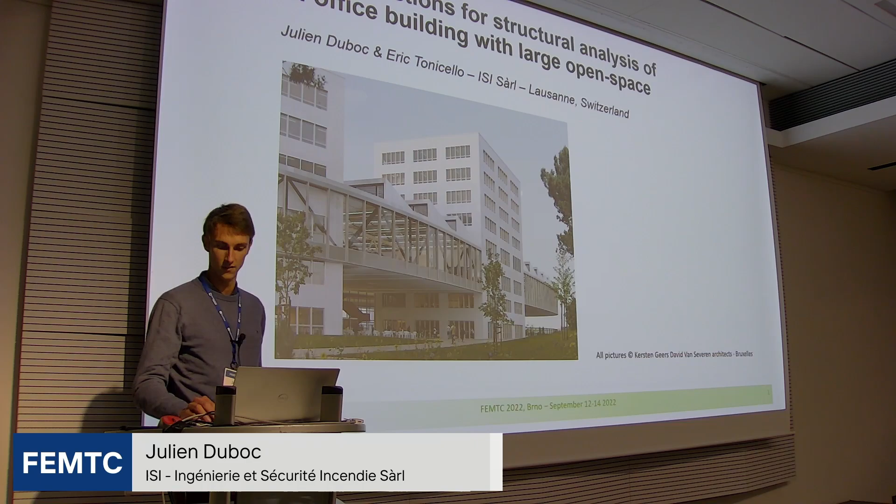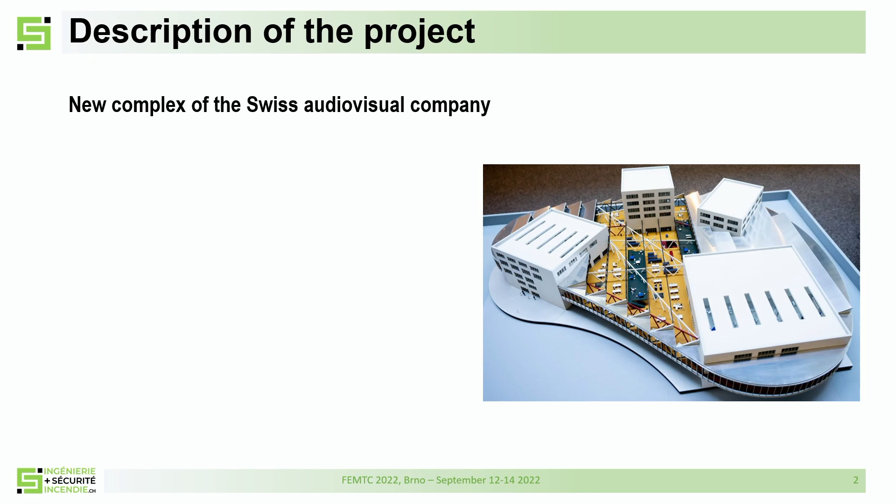Let's start with a few words about the project. This is a new complex of the Swiss audiovisual company. You can see pictures here. We have 4 distinct buildings connected to each other with a hall on the first floor and an open space on the second floor. We have different uses for this complex: radio studios for production, broadcast, offices, and administration activities.

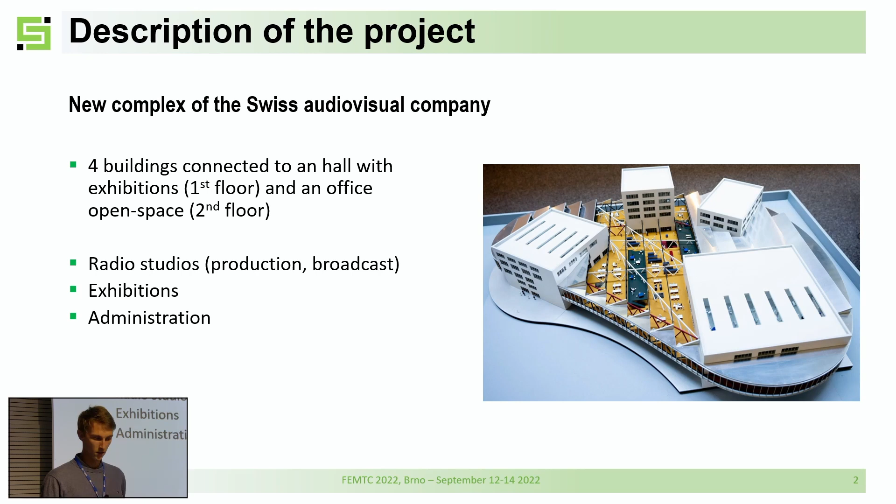So it's a structural analysis, and we focus on the fire resistance of the structure. For this building, according to Swiss regulation, we have a requirement of 60 minutes. For the buildings themselves, there is no specific issue as they were designed according to Eurocode 2 with good covering for the rebars.

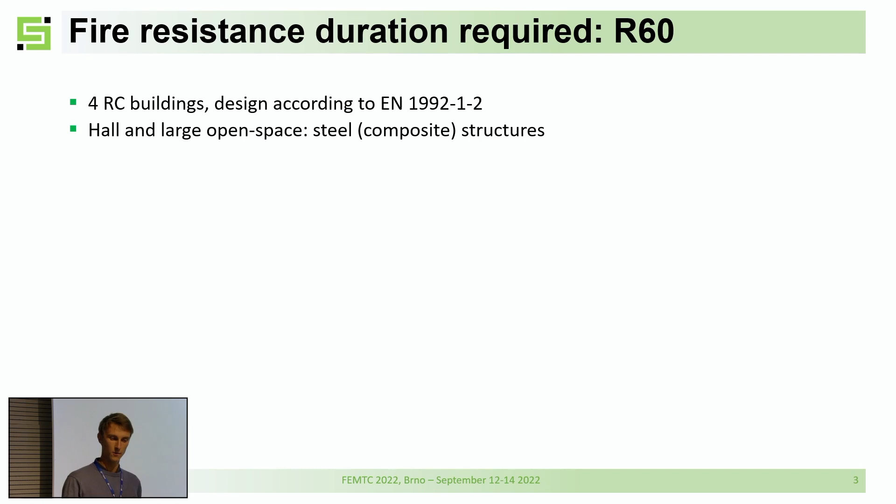But it's not the same for the hall and the open space, because we find steel members, with ceiling beams and truss members - you can see pictures here at the bottom. We cannot achieve the R60 requirement for the steel members, both for the hall and for the open space.

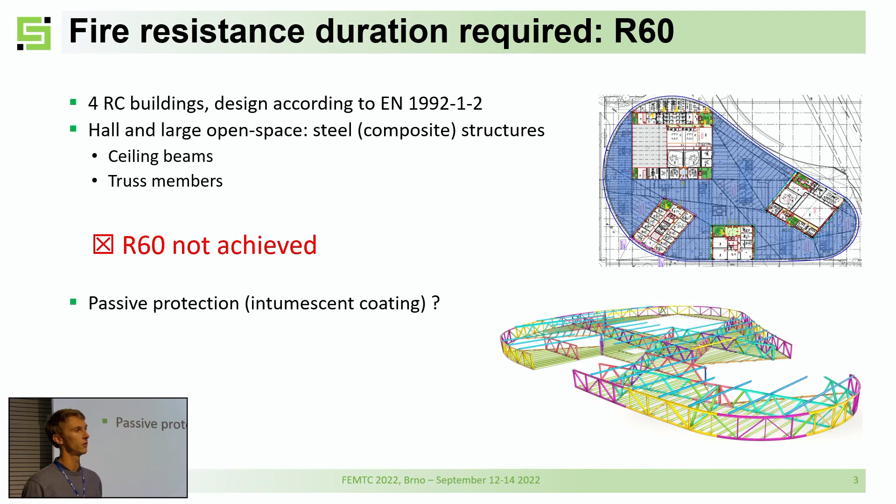So we had to find solutions to improve the situation. It could be passive protection such as fire panels or intumescent coatings, but due to the height of the buildings and the connections between beams and truss members, these options seemed very expensive.

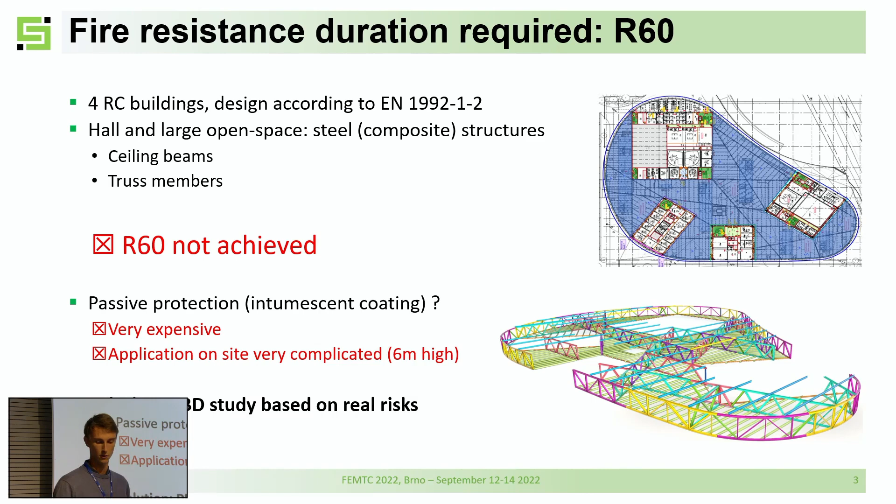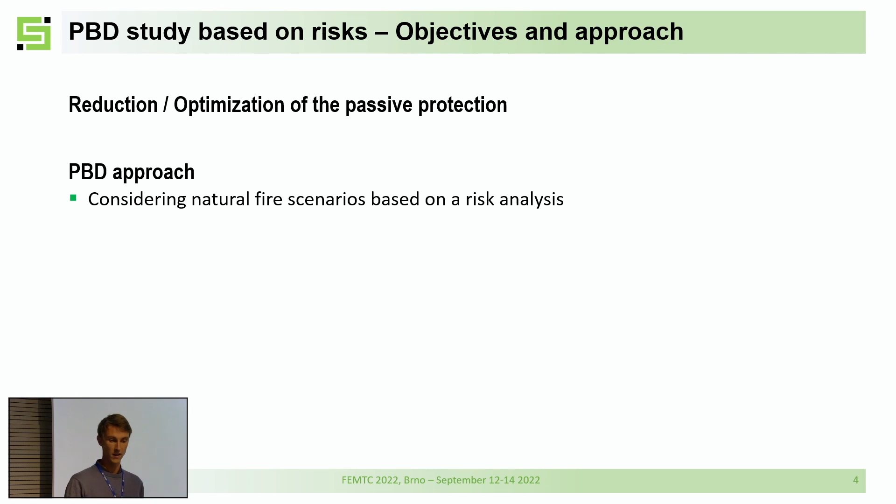So we had to find another solution, and it was a performance-based approach based on risk analysis for these specific areas. The goal of the PBD approach is, of course, to reduce or optimize the need for passive protection, based on a natural fire approach.

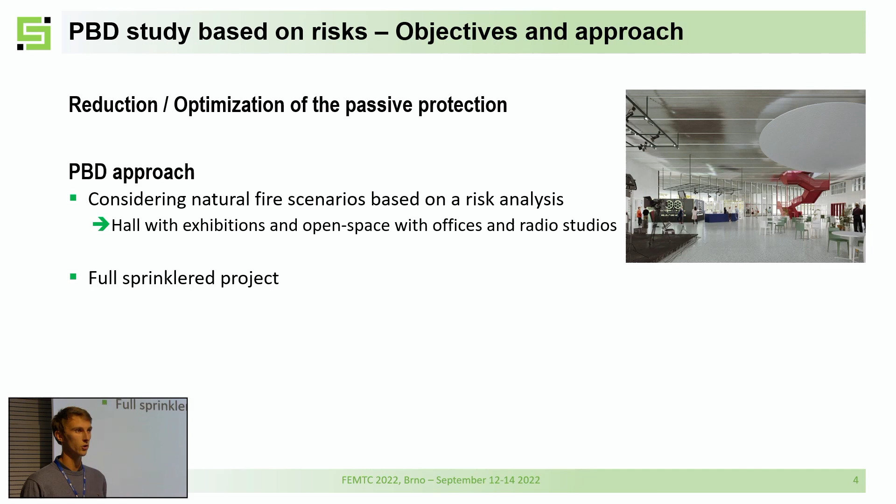If we focus on the risk for the areas, we have a hall with exhibition and reception, and an open space with offices. So we have a fire load density which is quite moderate. We have a full sprinkler project as well, with probably good reliability. And also, as we see in the pictures, we have large windows on every facade, so very good ventilation conditions, which is quite important. We can qualify the risk as moderate for these buildings, which gave us a real chance to make some savings with this kind of approach.

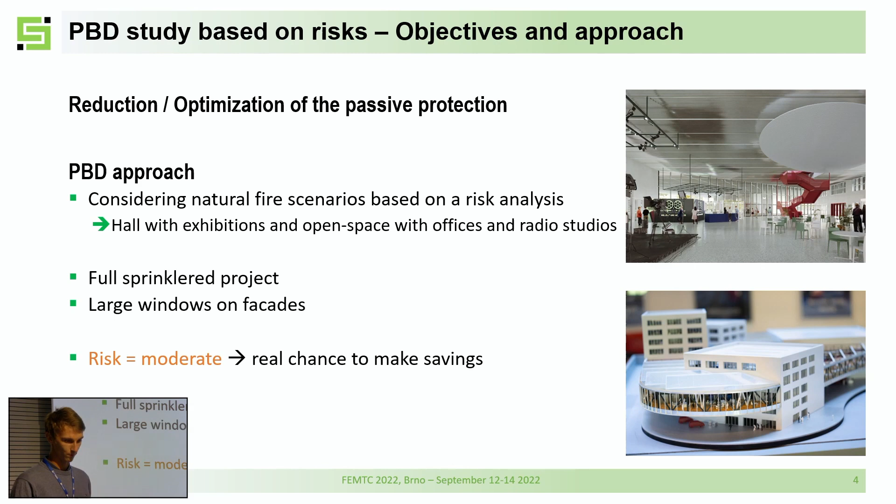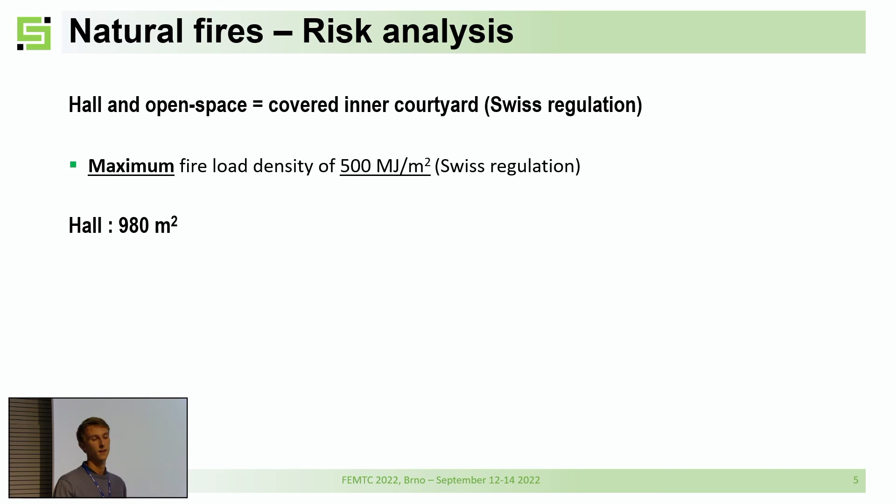So let's focus on the scenarios and the real risk for this building. According to Swiss regulation, the hall and open space are considered as an inner courtyard, where we have a maximum fire load density allowed of 500 megajoules per square meter. This is a first scenario: we can have a uniformly distributed fire load density over the entire area, up to 500 megajoules per square meter. But more specifically for the hall, we have receptions, maybe some events during the year, exhibitions, so it could probably be a more localized fire load density.

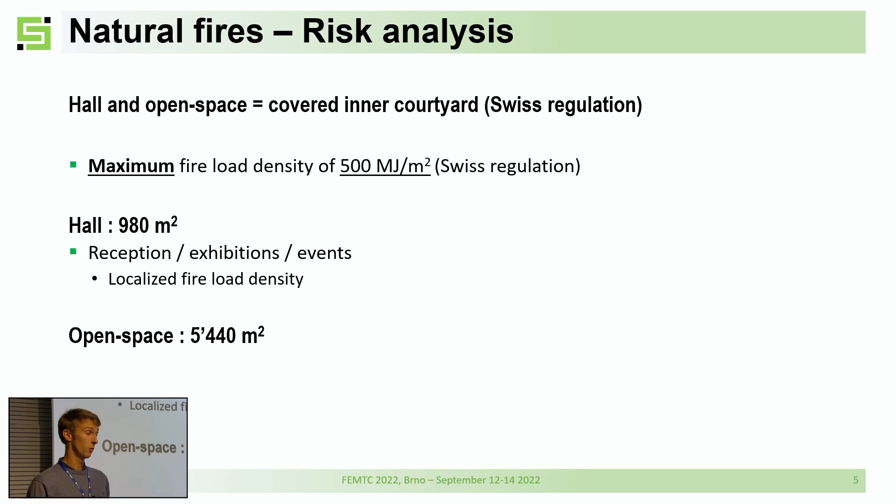For the open space it's quite the same - we have offices, maybe rest areas with seats, sofas, or others. So we can have both scenarios: compartment fire scenarios and more localized fire scenarios.

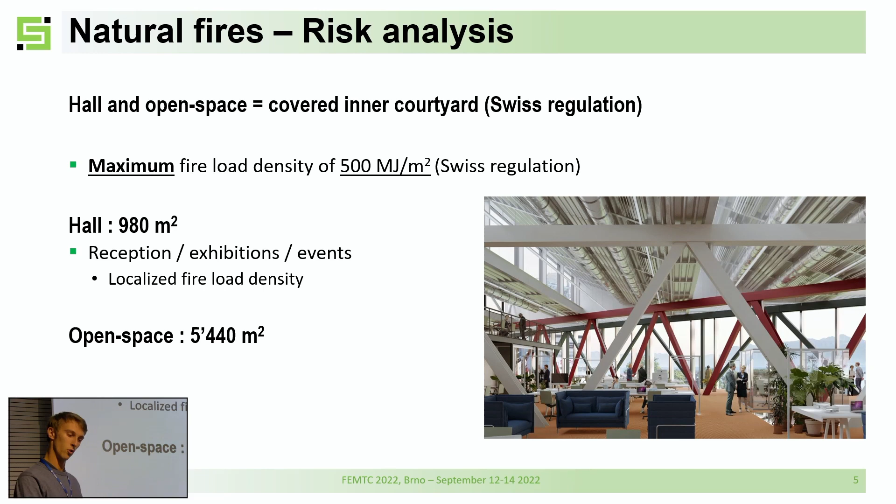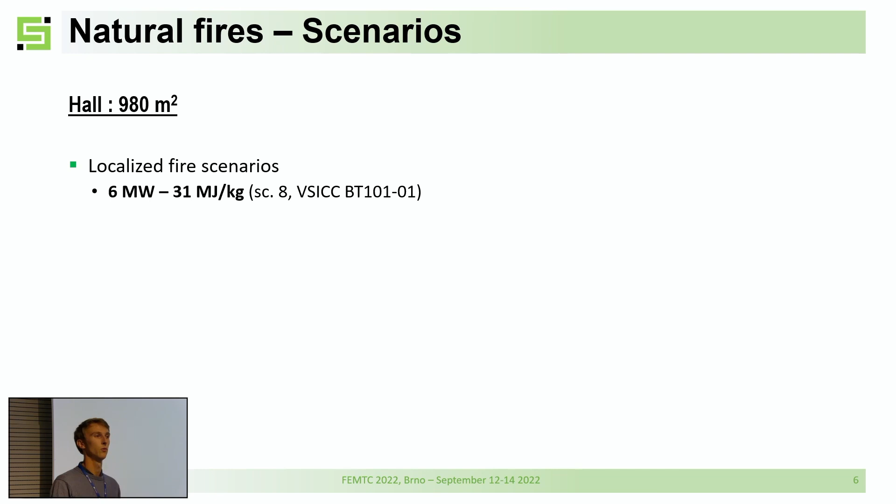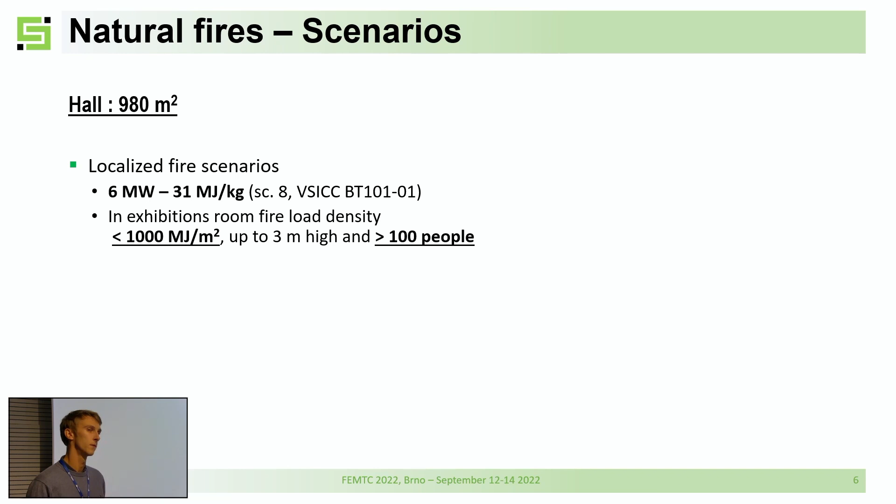So we defined some localized scenarios for the hall according to the German standard, which is often used in Switzerland for the localized fire scenario approach. For the hall, we considered a scenario with a maximum heat release rate of 6 megawatts, which is quite representative of an exhibition room, with moderate fire load density and more than 100 people, which is quite representative for our area.

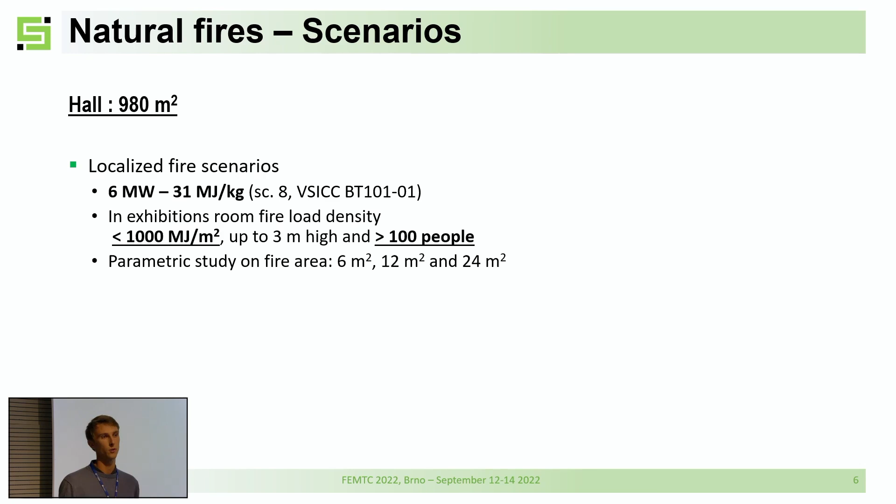We made a parametric study on the fire area in order to consider different heat release rates per unit area: 250, 500, and 1,000 kilowatts per square meter. Here we have the scenario, the heat release rate curve for the 3 localized fire scenarios we considered.

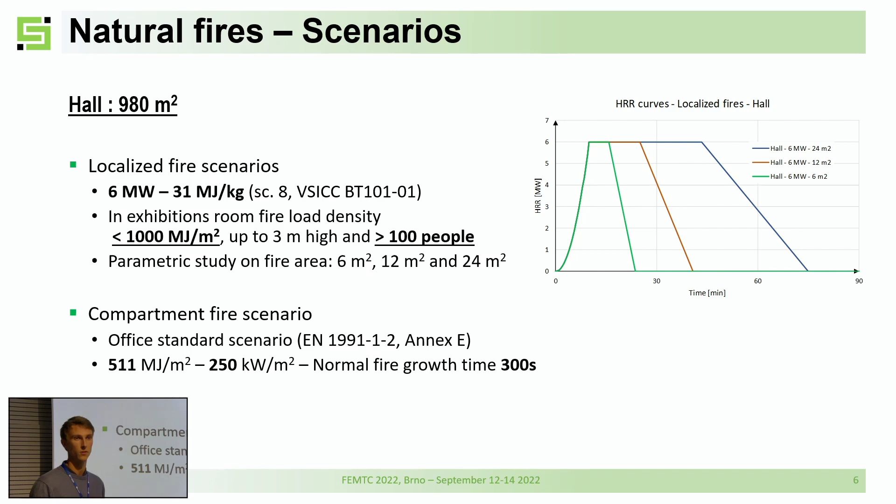And of course we considered the compartment fire scenario as well, with an office use, according to Eurocode 1 Annex E, with a maximum fire load density of 511 megajoules per square meter, which is quite representative of the maximum fire load density allowed for the zone, according to Swiss regulation.

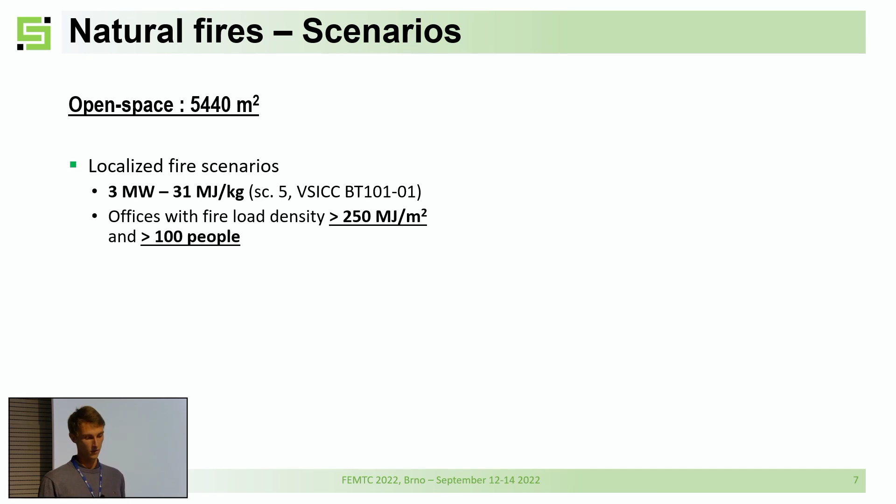Now for the open space, it's basically quite the same, even if the localized fire scenario is a bit different because it's not the same occupancy, not the same use. So we considered a maximum heat release rate of 3 megawatts, representative for an office use with moderate fire load density and more than 100 people.

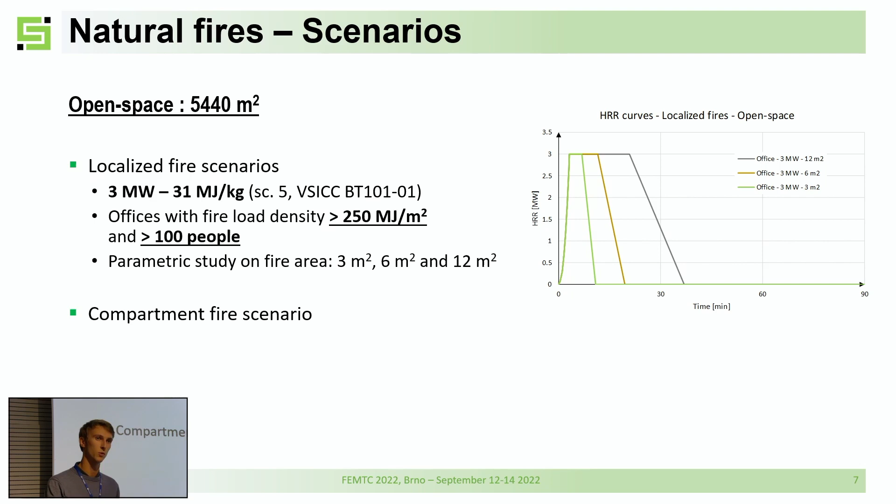We also made a parametric study on the fire area to get the same heat release rates per unit area as we saw just before. Here we have the curves, and we also considered the compartment fire scenario for an office use, still according to Eurocode 1.

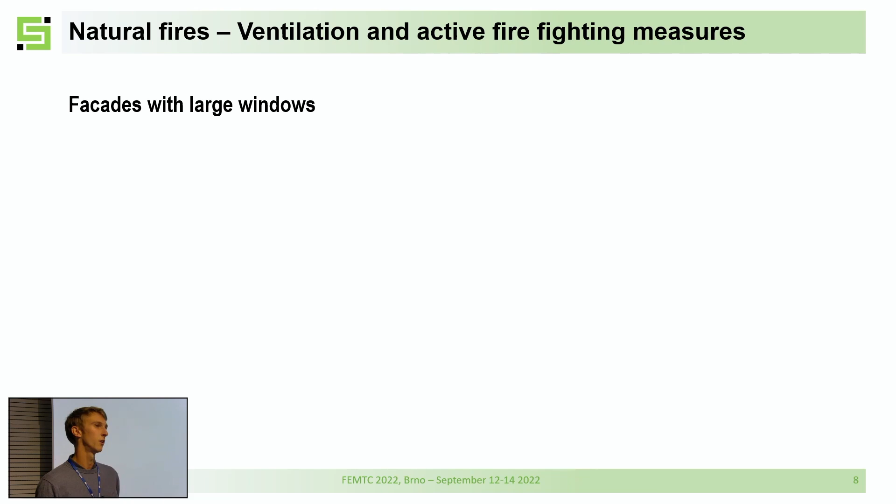So a few words about the ventilation and the firefighting measures we have for the study. As we said before, we have large windows on every facade with double glazing.

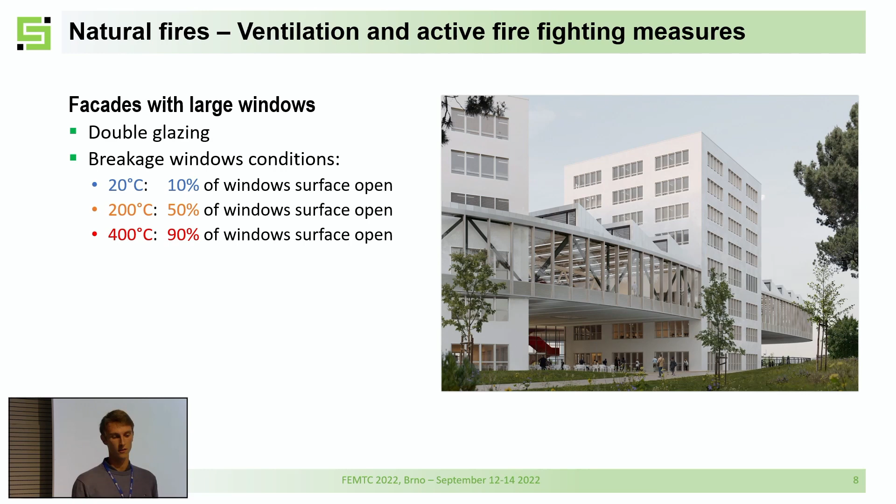So we can consider the breakage window conditions for this double glazing with 10% of the windows open at ambient temperature. Then we can consider 50% of the windows open when the temperature reaches 200 degrees, and around 90% when the temperature reaches 400 degrees.

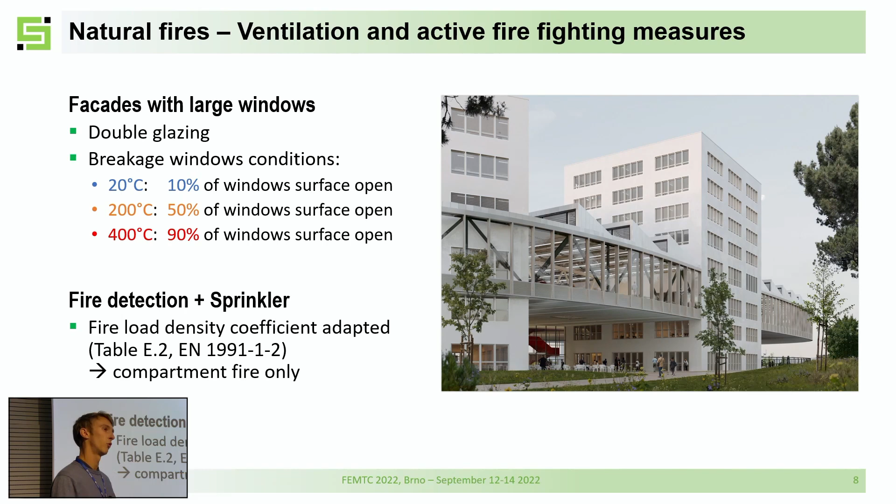Also, we have a full fire detection and sprinkler system in both the hall and the open space, so we can adapt the coefficient of the fire load density still according to Eurocode 1. This consideration is accepted in Switzerland, but only for the compartment fire scenario, not for the localized fire scenario. So we can reduce the fire load density just for the compartment fire.

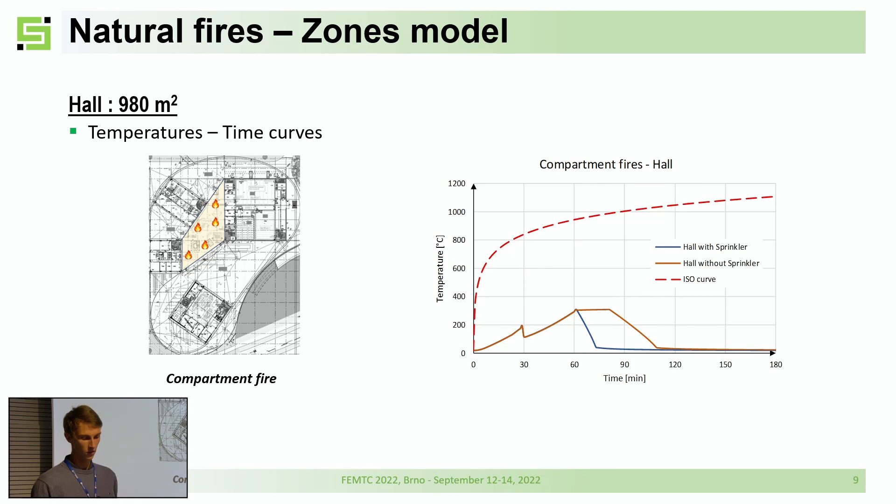The blue curve is the gas temperature results with sprinkler installation, so with the minoration of the fire load density. And the orange curve is the gas temperature results without sprinkler. What is interesting to see is the maximum gas temperature in the upper zone, which is less than 400 degrees.

So for the structure, it's very, very good, as we have no decrease of the steel resistance. The steel keeps the same resistance as in the cold situation. So we can say that the requirement R60 is achieved for the beam, the ceiling beams in the hall.

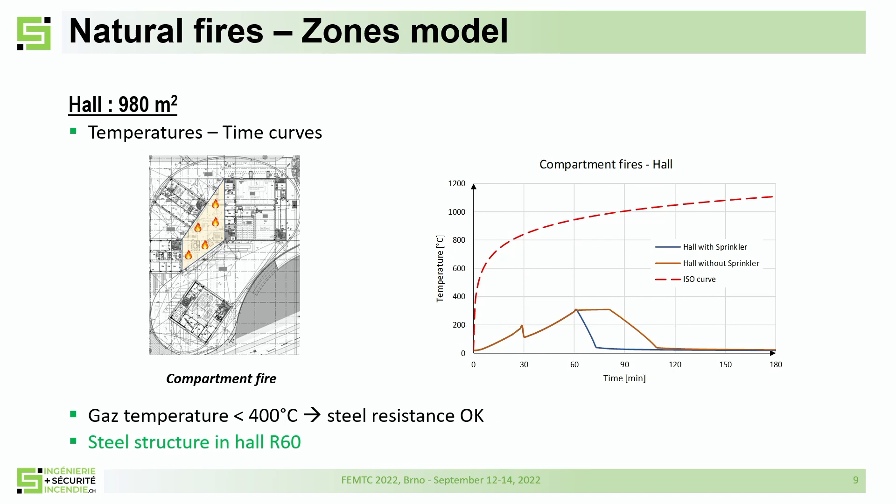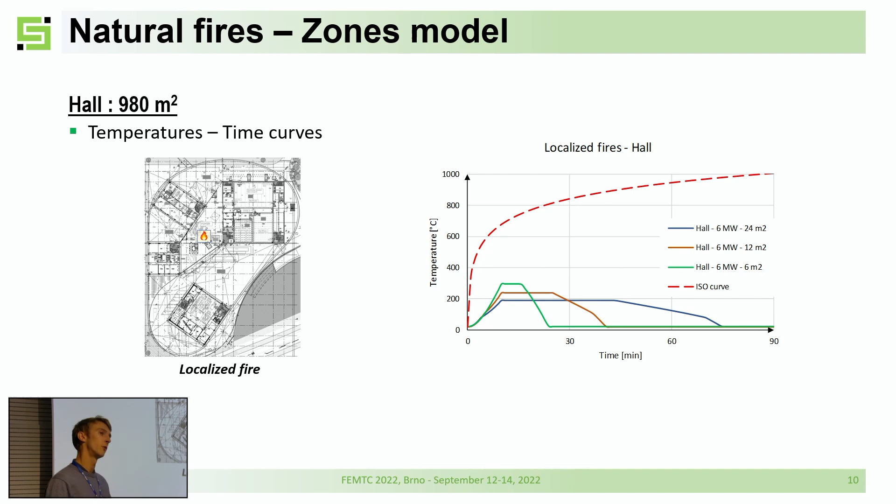Now for the localized fire scenario, here we have the results for the three different scenarios we considered, with the three heat release rates per unit area. And the conclusions are the same, as we have a gas temperature less than 400 degrees. So of course the steel temperatures remain less than 400 degrees.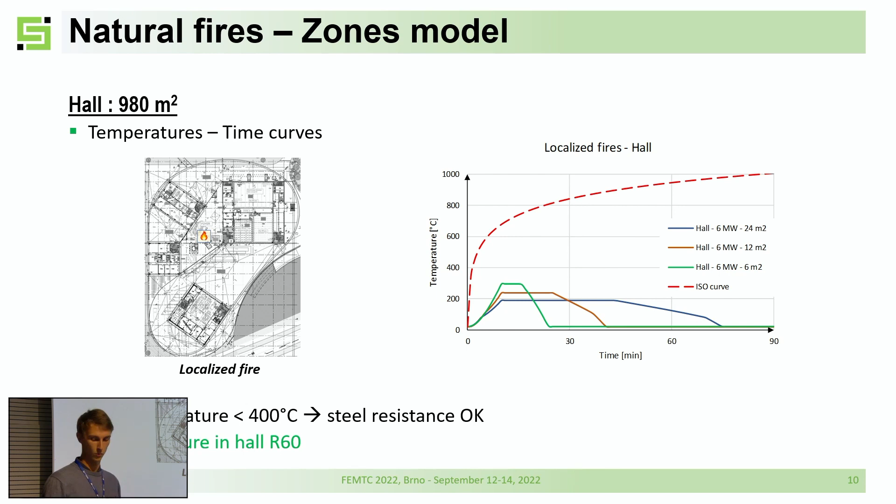Here we have the result for the open space. So it's a bit different. The first thing is the surface area, which is used, is more than 5,000 square meters.

So we have still two different curves, two continuous curves: the blue one with sprinkler, the orange one without sprinkler. And the discontinuous curves correspond to the steel temperature, because we made some thermal calculations in order to have an idea of the steel temperature if they were exposed to this kind of thermal stresses.

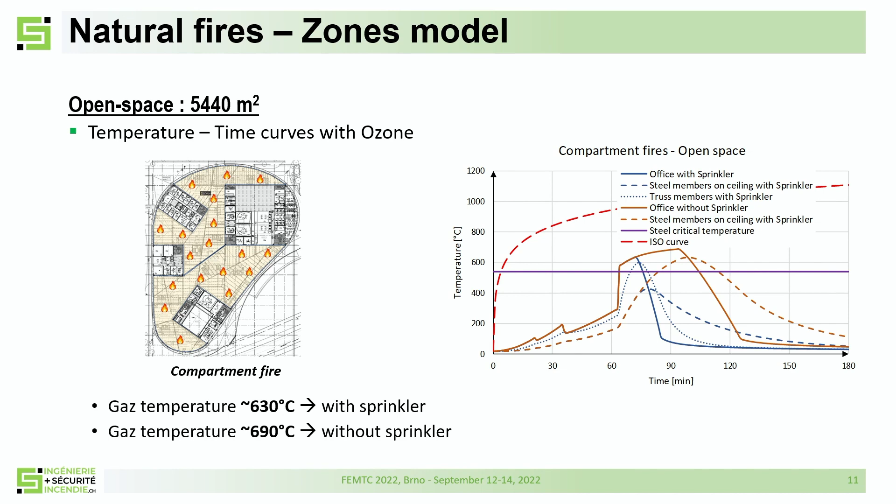So what is interesting to see on these pictures is that for the ceiling beams, the steel temperatures remain under the critical temperatures, so that's quite okay. But it's not the same for the truss members, because we have steel temperatures higher than the critical temperature. So for this scenario with this zone model approach, the steel members for the ceiling beams are okay, but it's not for the truss members.

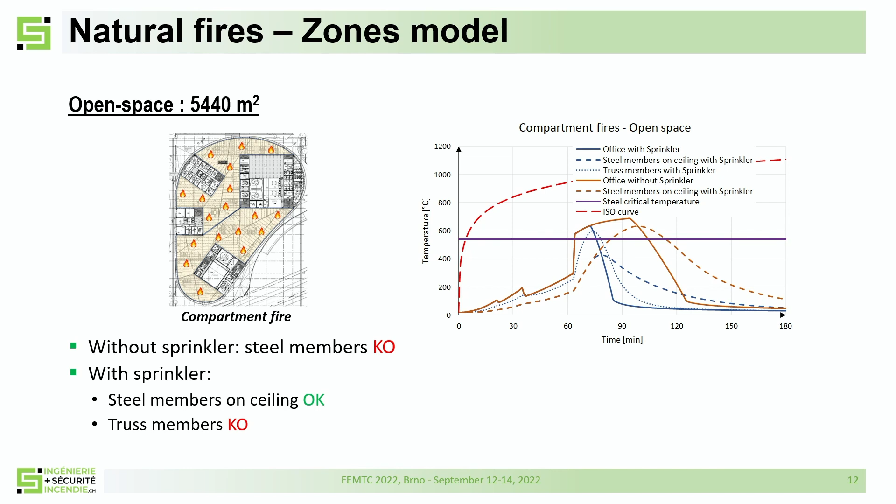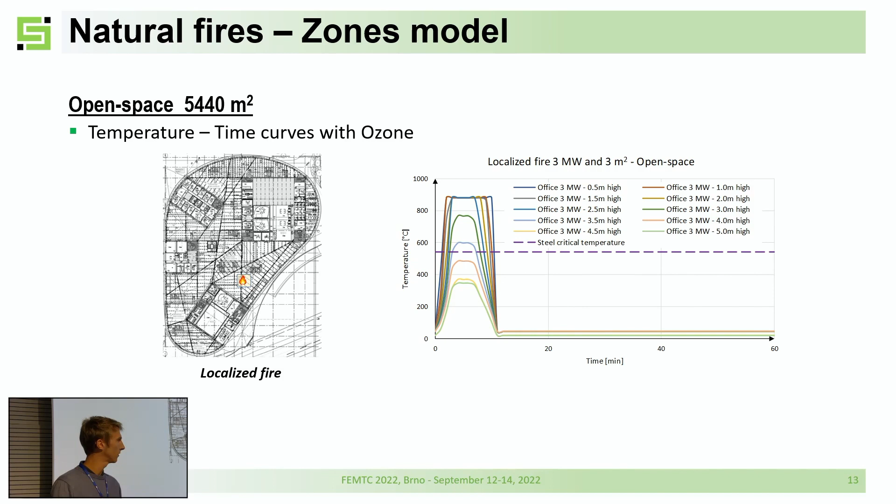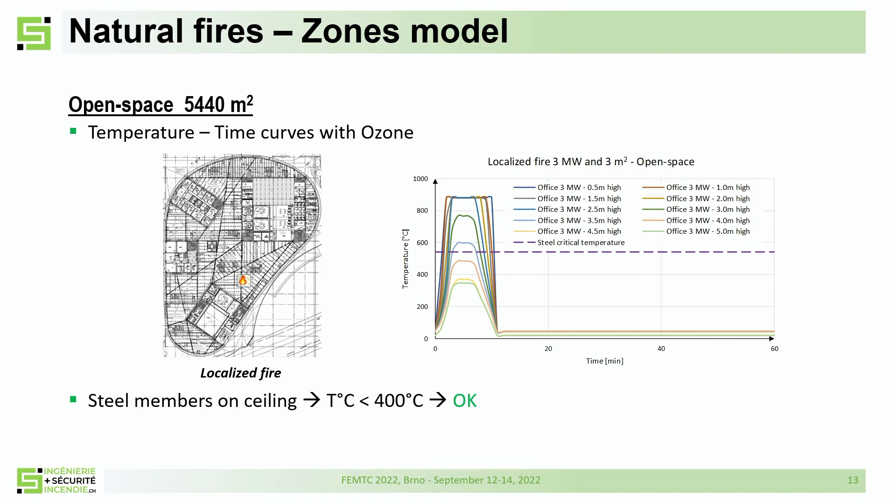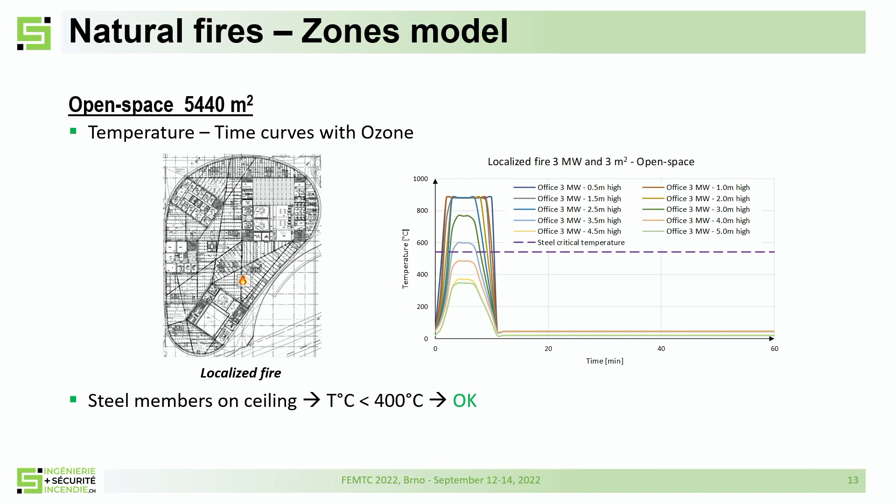So here we have the same for the localized fire scenario, just for the heat release rate per unit area of 1,000 kilowatts per square meter. We can see that for the ceiling beams, which is the lowest curve, the green one, we have temperatures under 400 degrees. So we can have the same conclusion as for the hall, but it's not the same for the truss members. It depends on the height, but we can get temperatures higher than the critical temperature for steel. So the truss members are KO.

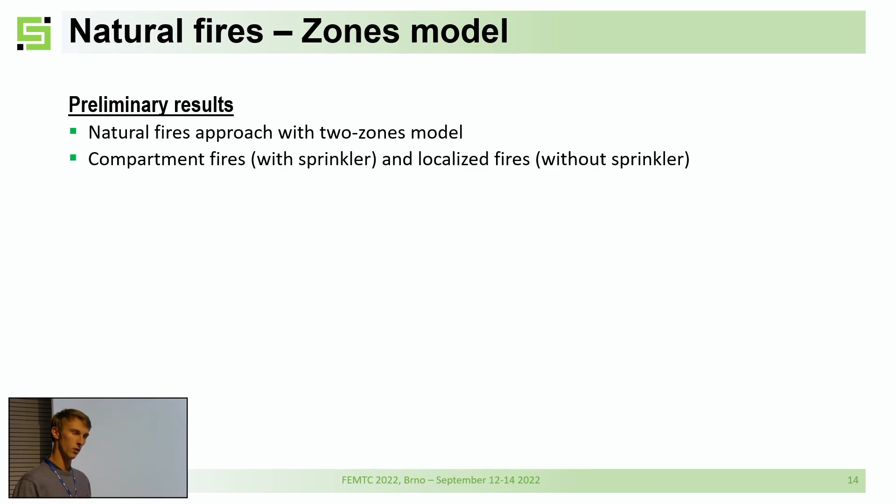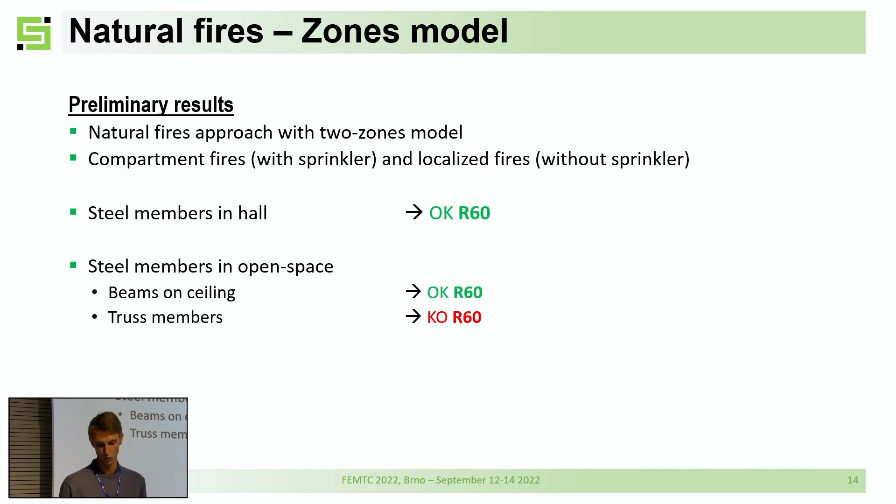So, preliminary results: we considered the first approach with a very simplified model, a two-zone model. We considered compartment fires with and without sprinkler, and localized fire scenario without sprinkler. We saw that the steel members for the hall are okay; we achieved the R60 conditions. But for the open space, it's a bit different. It's still okay for the steel members, but not for the truss members. So it seems that we had a chance to reduce the need of passive protections for these buildings.

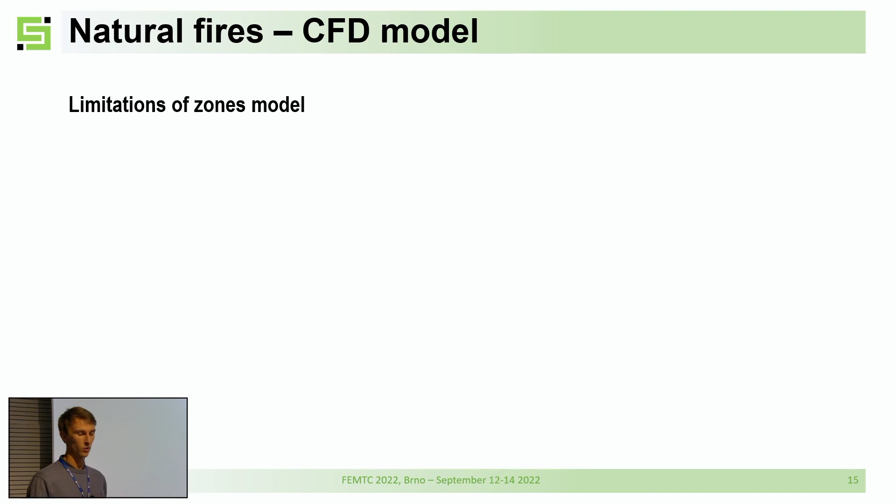But now we can ask some questions about limitations of the models. We saw yesterday in the presentation of Niels the limits of the two-zone models in terms of surface area. Here for the open space, we have more than 5,000 square meters, which is used. So we can have some doubts about the results obtained with the zone model, so that's the first point.

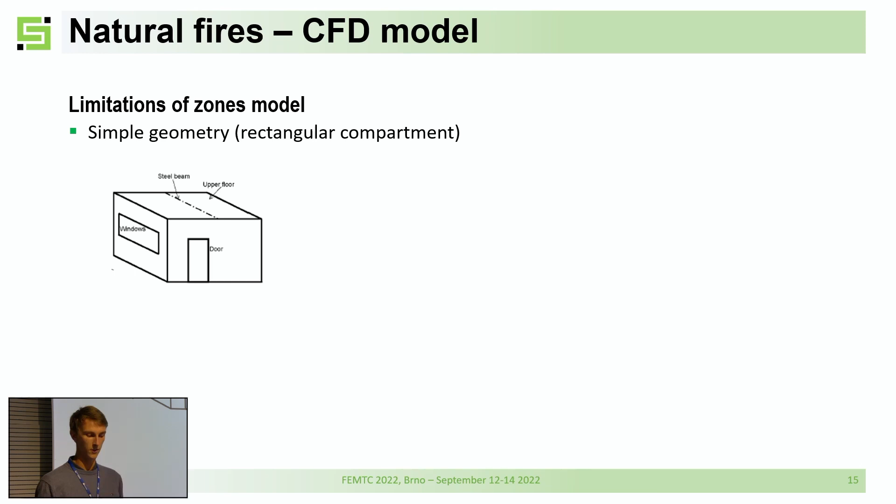And then about the geometry of the compartment, we know that for the zone models, they make some assumptions, and of course they consider a very simple geometry, a rectangular geometry, as we see here, which is totally different from our open space, which has a shape like this. So it's completely different from a rectangular compartment.

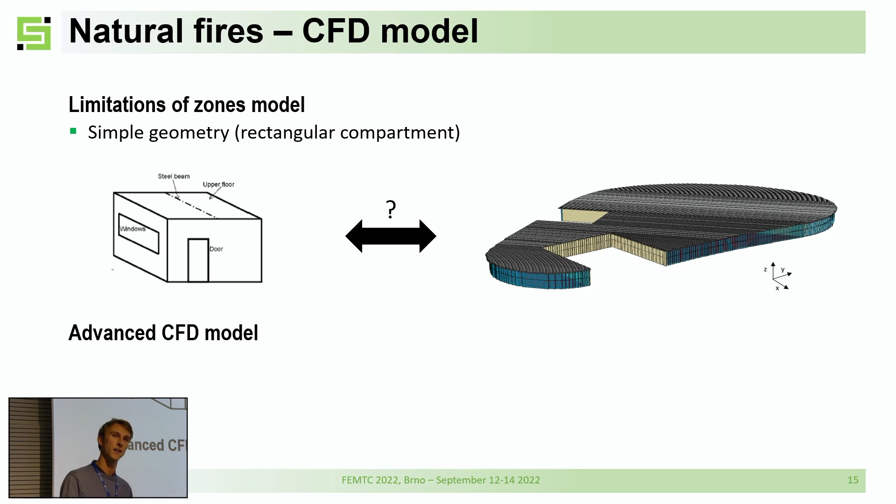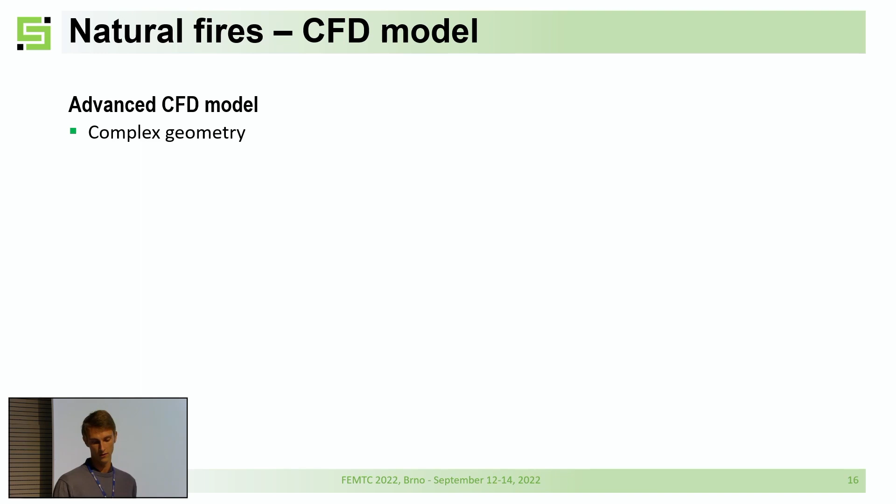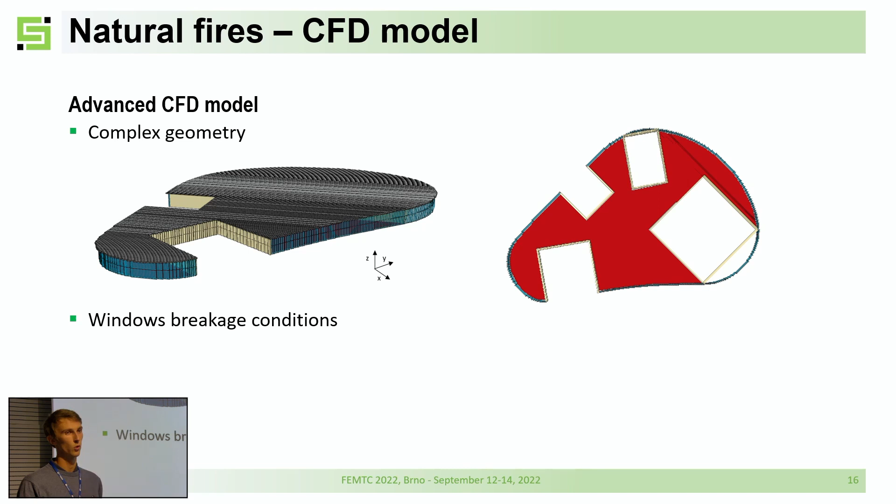So we carried out the study with a more advanced fire scenario using CFD and FDS in order to consider this complex geometry, to see if we can validate or not the results obtained with the zone model. We imported the complex geometry thanks to the IFC file into PyroSim in order to consider the real complex geometry for the open space. We also defined the same window breakage conditions for our model, with different devices located on the windows in order to consider the different breakage as a function of temperature.

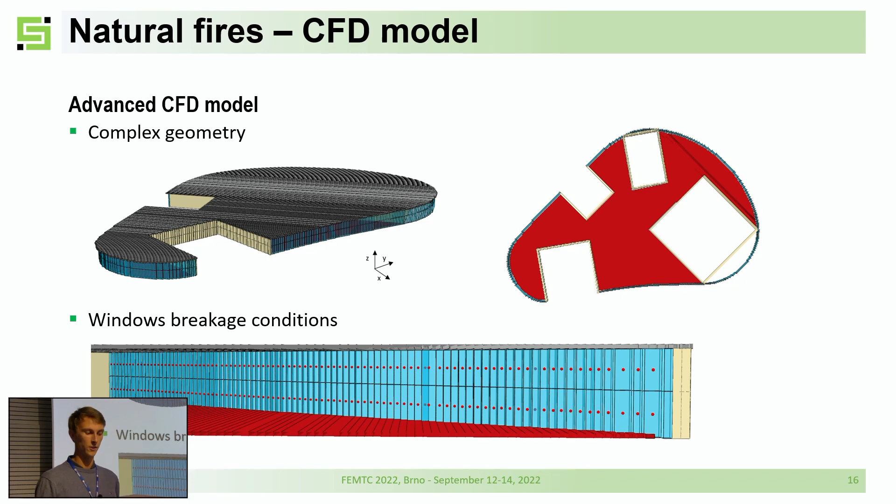We considered a reaction of combustion representative of an office use, with 50% plastic and 50% paper.

We considered the same fire parameters in order to compare the results obtained with the zone model and the results of FDS: the same heat release rate per unit area, the same heat of combustion, and the same fire load density.

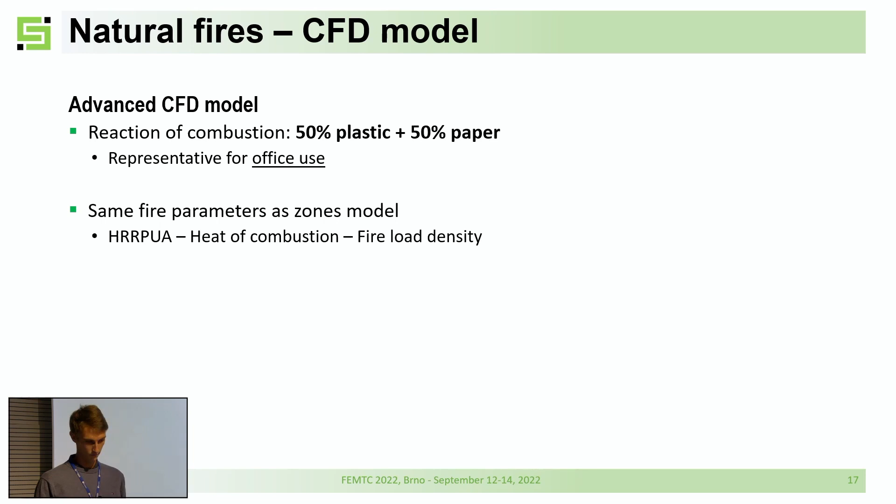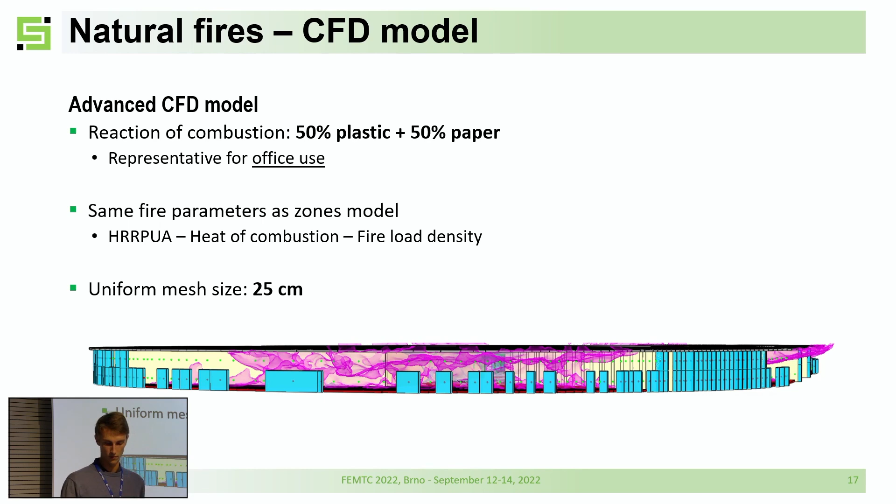So what about the results? Here we have the same graph as before, but we just added the results obtained with FDS.

This is the continuous gray curve. We can see that the trend of the curve is quite good compared with that of the zone model, but the temperatures are higher than those obtained with the zone model, and the fire duration is quite different because the fire is longer with FDS than with OZone.

We also see a difference at the beginning of the simulation in terms of temperature, because with FDS we have higher temperatures around 200 degrees, whereas it's quite low with the zone model. We can explain this with an assumption we made: with the zone model we considered a spread of the fuel area, whereas in FDS we consider that all the fuel area burns from the beginning of the simulation.

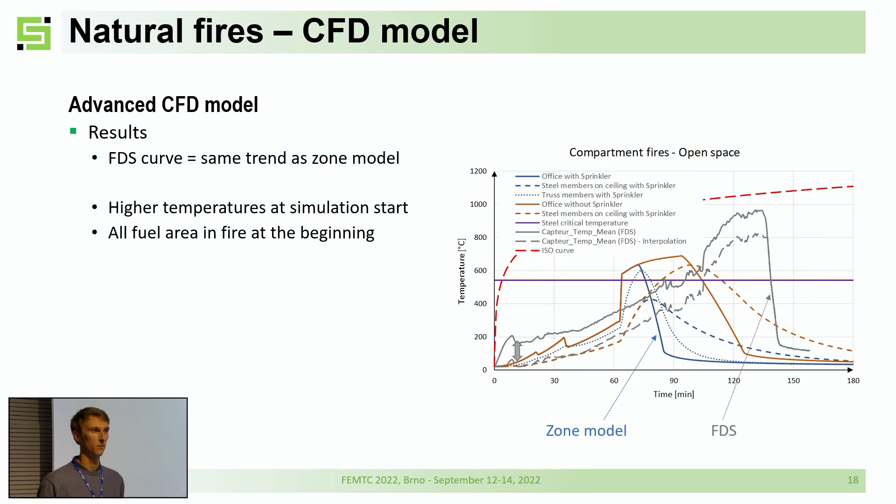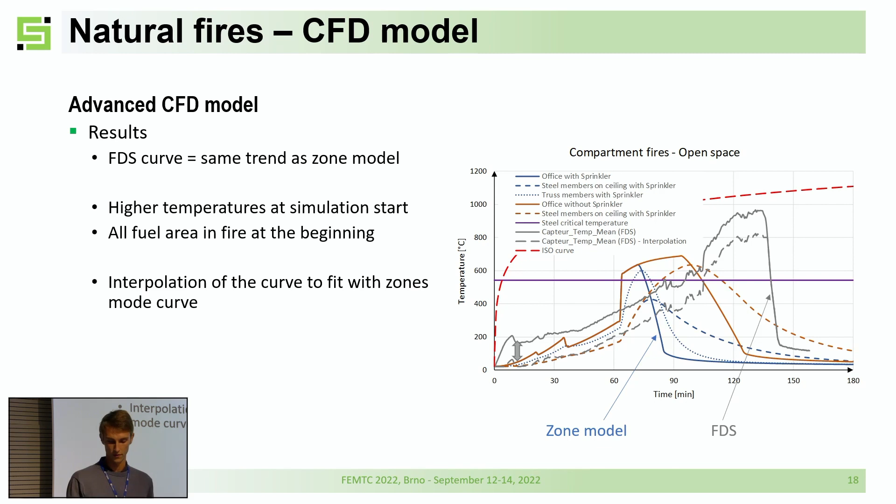So we tried to make a kind of interpolation of this curve in order to fit a little bit more with the zone model curve. This is the gray discontinuous curve, but still we have higher temperatures and a longer fire scenario.

So the conclusion is that we cannot validate the results obtained with OZone, because we have higher temperatures and a longer fire duration.

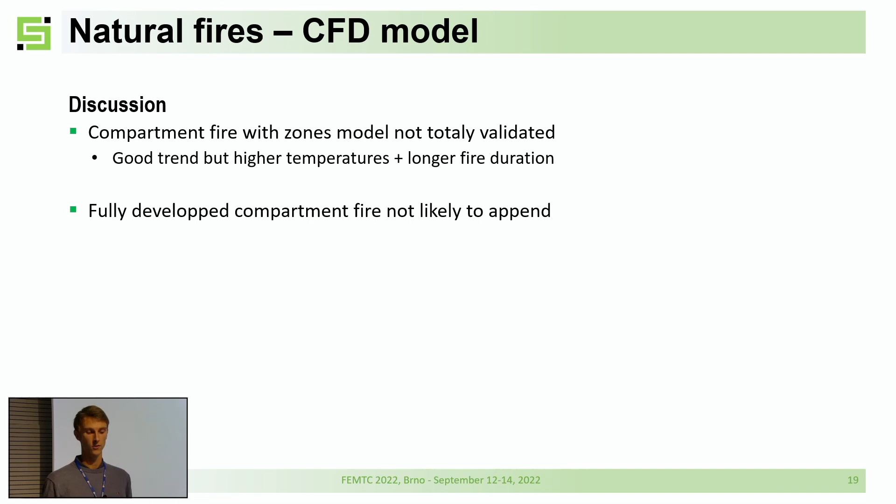But at that step, we can ask whether the compartment fire scenario is reliable for different points. The first is the fuel, because we have several localized fire zones compared with a uniformly distributed fire load density. We have sprinkler installation with probably good reliability, even if we cannot consider the sprinklers will activate at 100%. But the very important point is the last one.

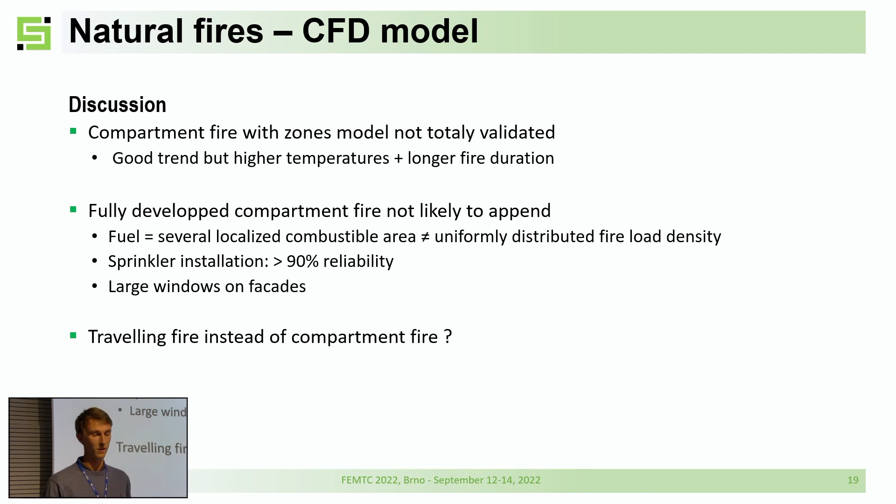We have large windows on facades, so very good ventilation conditions. That's very important, and we ask whether the traveling fire scenario would not be more reliable than the compartment fire scenario. So we made some investigations into replacing the compartment fire scenario with this one.

The traveling fire can be defined as a localized fire which is moving along the compartment. We made some research on publications, because there were lots of research projects on this topic. More particularly, Marion Charlier, who works on it, made lots of experiments with different fire load densities and different opening factors.

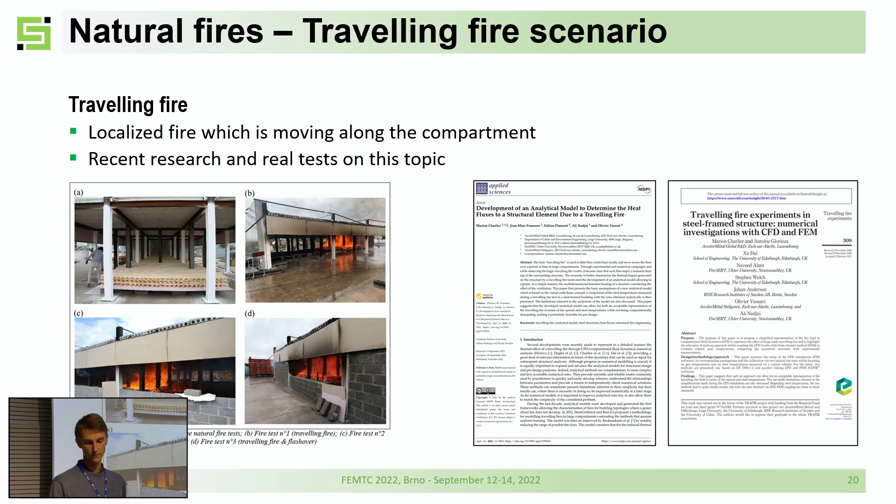In this research, they highlighted a very important parameter for the traveling fire: the opening factor, which is a function of the windows area, the walls area, and the height of the windows.

On the graph, we have results for an office use, with fire load representative of an office and with different opening factors. We can see that with an opening factor greater than 0.1, the traveling fire is much more reliable than the compartment fire scenario.

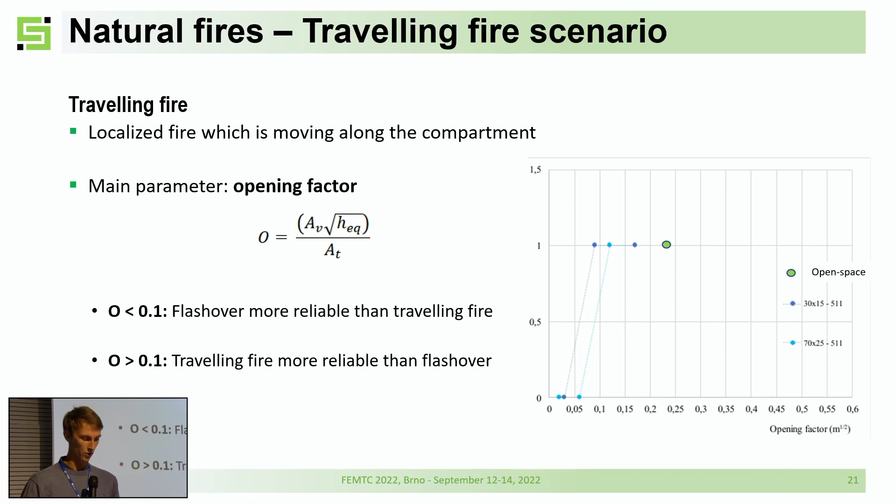That's very interesting, because we could calculate the opening factor for our project, for our open space with large windows on facades, and we get an opening factor of 0.23. So we can say that the traveling fire scenario is more reliable than the compartment fire one.

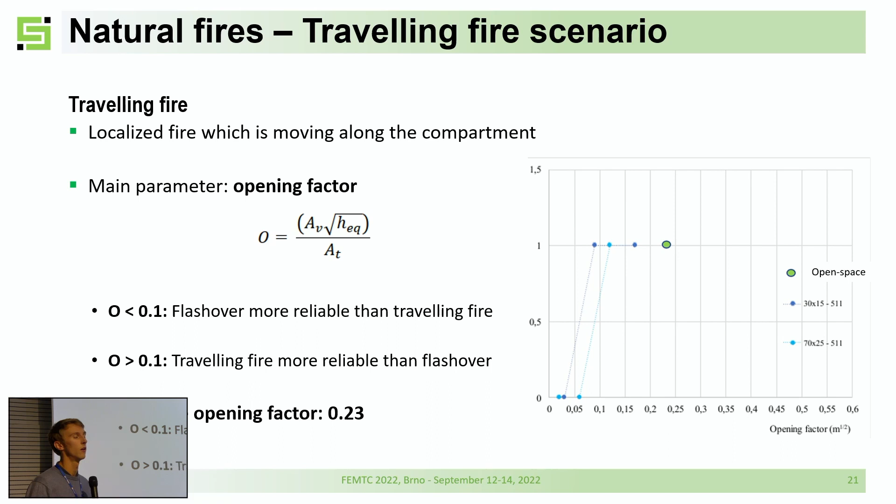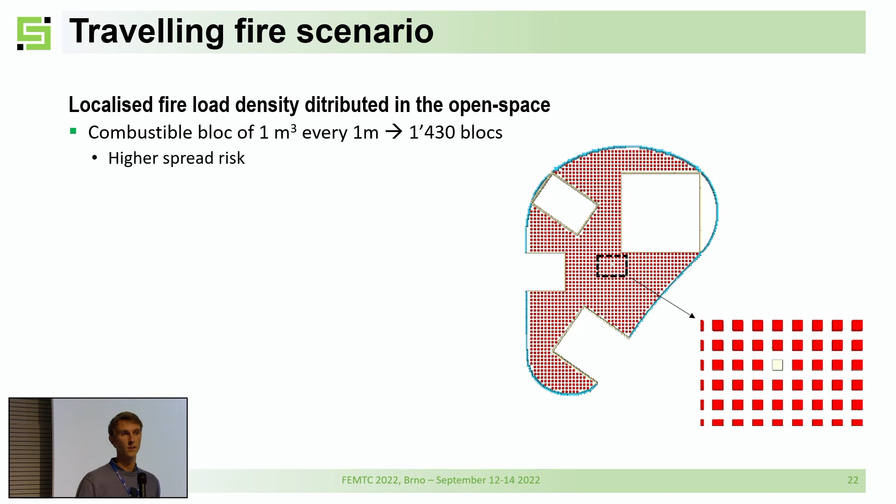So we calibrated our traveling fire scenario model according to the publications and other studies, replacing our compartment fire scenario model. We replaced the fuel with different combustible blocks located every 1 meter in the area, in order to increase the risk of spreading.

We considered spreading conditions based on temperature: vents on each face of the combustible block, and when the temperature reaches 250 degrees, the combustible block starts to burn.

Also, a conservative assumption is that we consider the initial fire in the center part of the compartment, in order to be far away from the windows.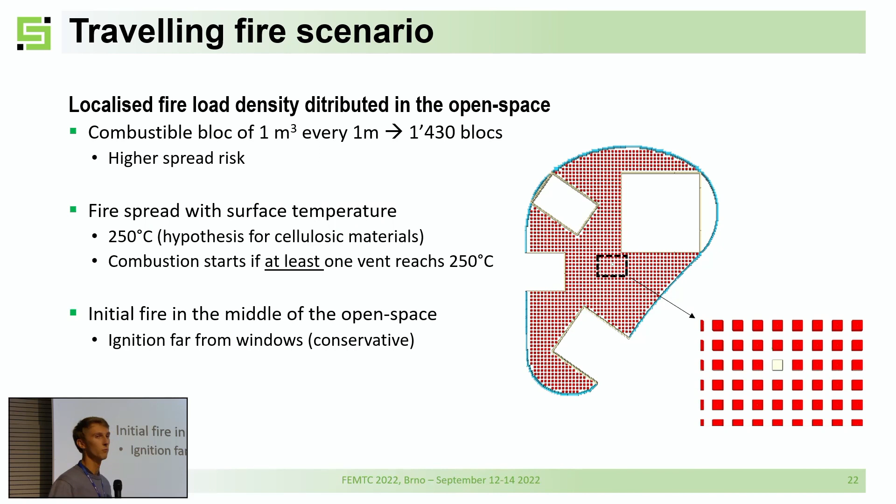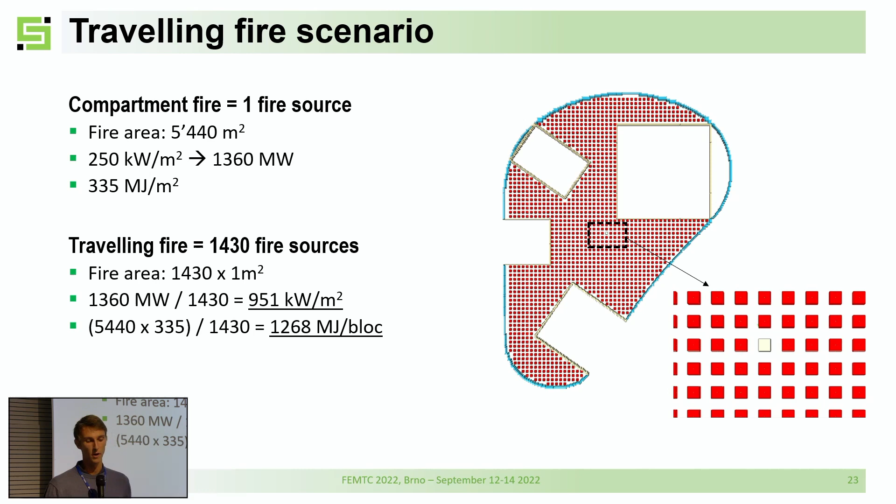Here we can just compare the different fire parameters. Okay, let's continue with the results. Here we will see a video of the simulations, with the initial fire in the center part of the compartment, and then we will see the fire spreading.

At the first step, we keep all the windows, and at that moment we can observe the window breakage, the smoke disappears, and we have the front flame moving along the compartment. This scenario is very representative of a traveling fire scenario, and it continues the same way up to the end of the simulation.

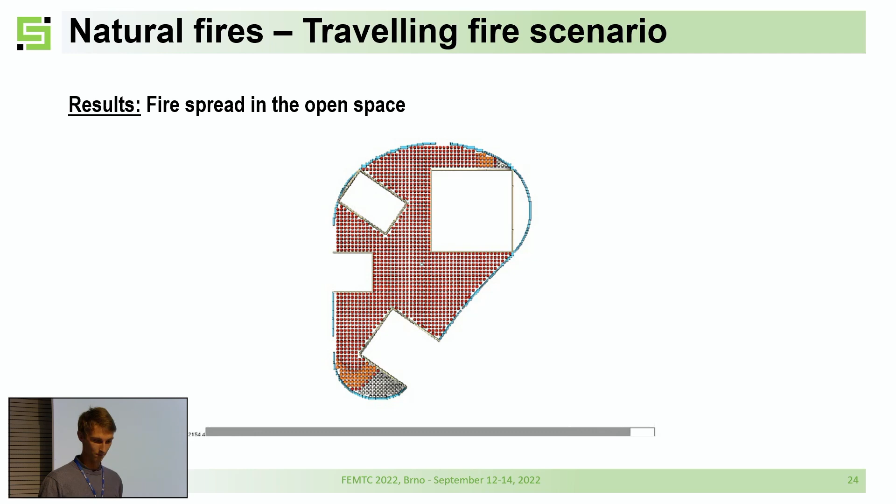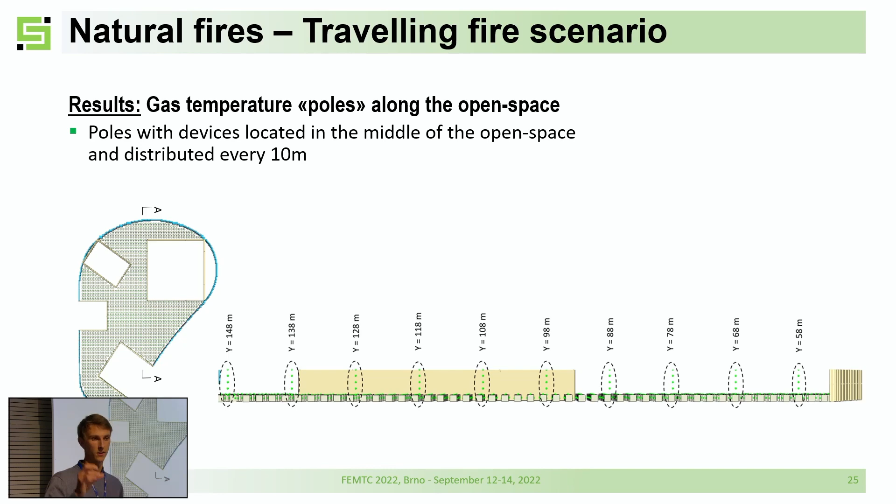So in order to get the results for our structural study, we located different poles into the compartment, every 10 meters along its length, with temperature devices at different heights.

So here we have a 3D view with the green devices, which are the poles. Here we have the results.

We have the gas temperature results of the first pole, the one nearest to the initial fire. We can see the temperatures are quite moderate.

And then we have the fire spreading up to the next pole, 10 meters away in each direction. We keep the same thermal stresses around 450 degrees, with a short duration during which the poles are exposed to thermal stresses, around 15-20 minutes.

And that's the same for the other poles, the third one and the fourth one.

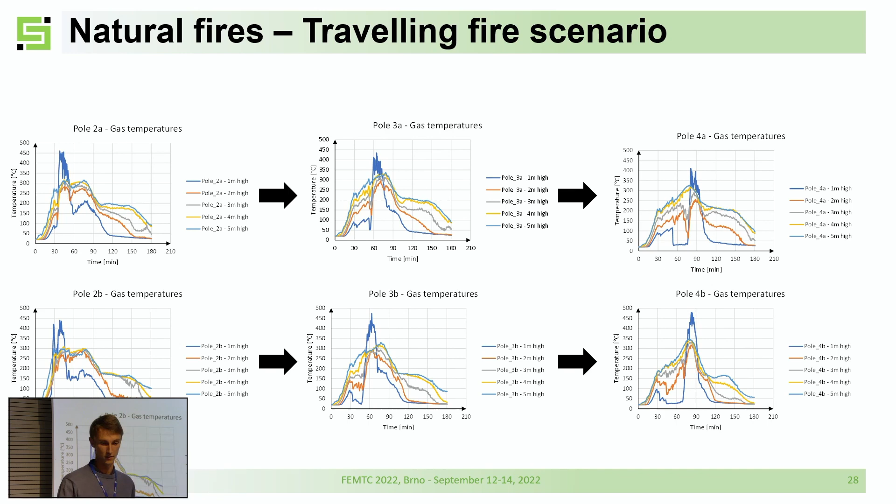So the next graph is very representative of the traveling fire. So we have all the results obtained with the poles.

So we see that we have a traveling fire, with thermal stresses moving through the space. So the steel members will be exposed during a short time at different periods.

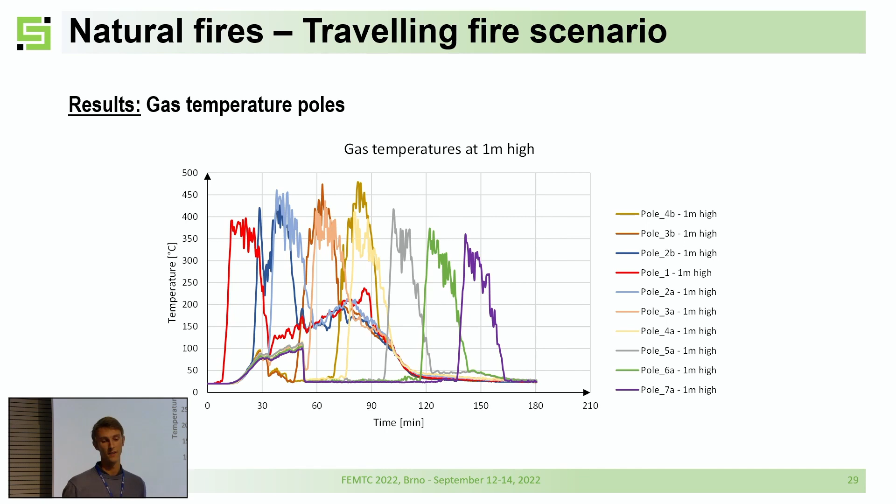For the structural analysis, of course, we were interested in the adiabatic surface temperature, which is often used for thermal calculations and structural study. So we allocated different AST devices on the ceiling in order to catch the temperature.

It's interesting to see that we have moderate temperatures around 400 degrees, which is consistent with the temperature obtained for the localized fire scenario. So it's lower than the critical temperature for steel, which was around 550 degrees.

So we can say that the R60 requirement is achieved for the steel members, or for the ceiling beams, with this scenario of the traveling fire.

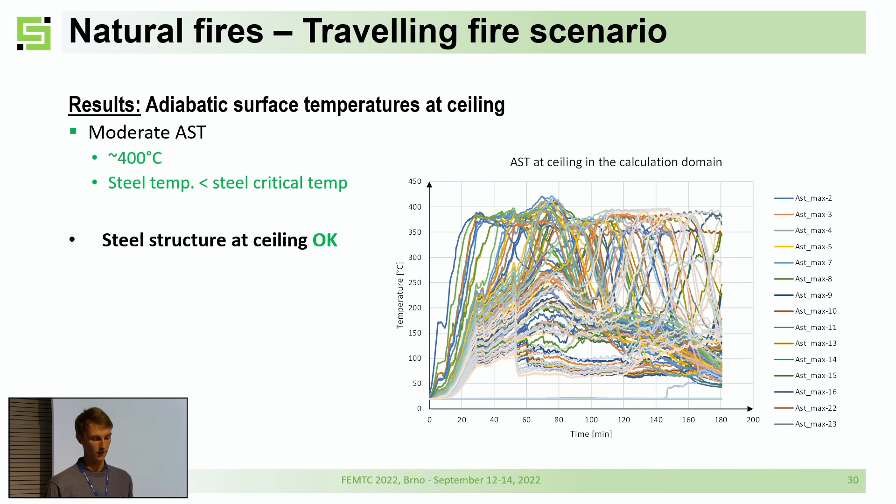To conclude, we carried out the performance-based design approach in order to reduce the need of passive protection, with several steps. First, a very simplified approach with zone models. We saw that we cannot really validate the results due to the limitations of this kind of model in terms of geometry shape and in terms of the surface.

And we saw that we could not really validate the result with the CFD model. And then we had the question of whether the compartment fire scenario was reliable or not. And finally, we kept the more reliable scenario, which was the traveling fire.

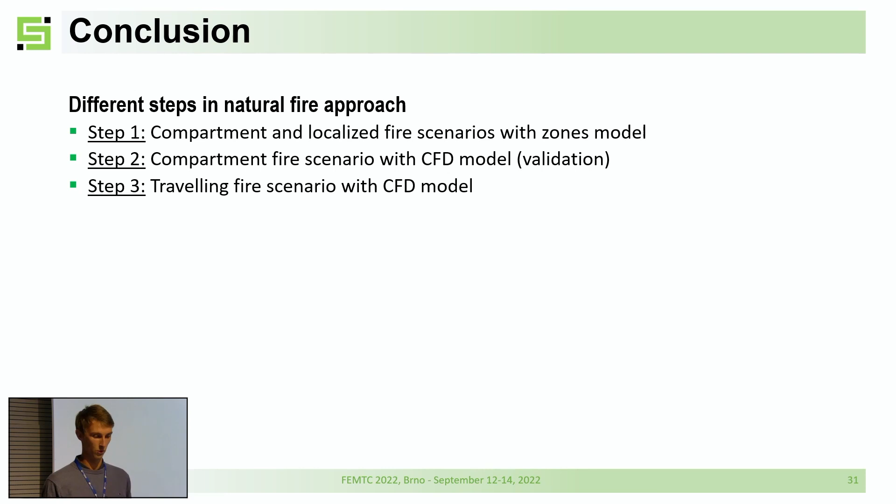And we could reduce the need of passive protection, so the client was happy with that.

Okay, that's it. Thank you very much for your attention.

One question regarding the structural analysis: you deduced from the temperatures that were at most 400 degrees Celsius that there is no need for a structural analysis, because the strength of the steel is not lowered.

But did you somehow make sure that there is no local failure like lateral torsional buckling for the ceiling beams, or did you test it somehow?

We could get deflections with this kind of temperature because, okay, the steel keeps the same resistance as at ambient temperature since we are below 400 degrees, but we can have other consequences. At that moment of the study, we just considered the thermal analysis to get some conclusions for the structures, but we didn't investigate the structural behavior under such thermal exposure.

No, we didn't investigate more.